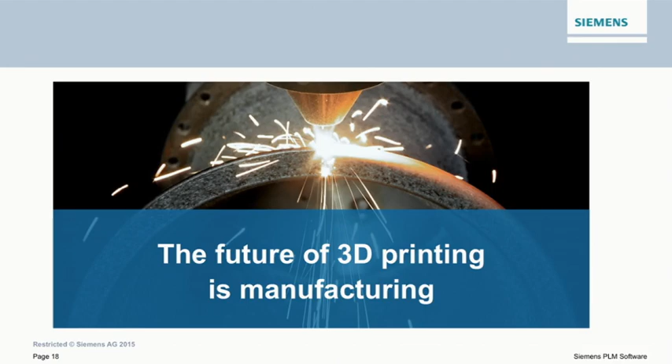So, in order to unleash these new capabilities, and in order for you to develop more innovative products faster, you have to really understand what is behind this. You have to liberate yourself from traditional process, from traditional thinking. You have to liberate your engineering creativity in order to really utilize this technology.

The potential of this technology is not so much limited today by the technology available today and what we have seen, what is coming tomorrow, but by our ability and your ability to utilize this technology.

Think in turning design for manufacturing, which is the traditional way of doing it, into manufacture what you design. Manufacture what you design. And that means think it, model it, and make it. So this is the slogan of this session: think it, model it, and make it.

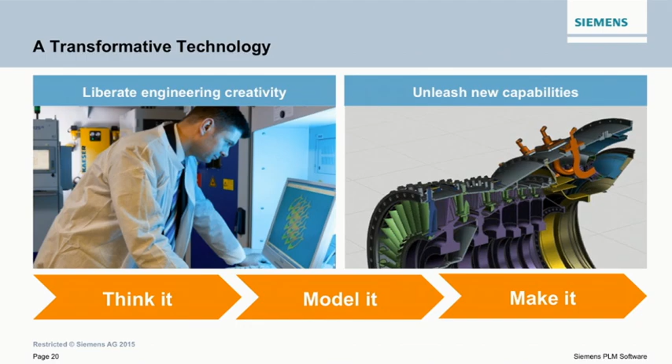And you will see a lot of examples why this technology is really a game changer. Listen, I have visited a lot of customers, a lot of companies involved in this, and I learn every day this technology is amazing and it can do amazing things.

You can actually design products which you couldn't make before. Totally new designs which can change the performance of your products dramatically. And that is a technology which helps you with this.

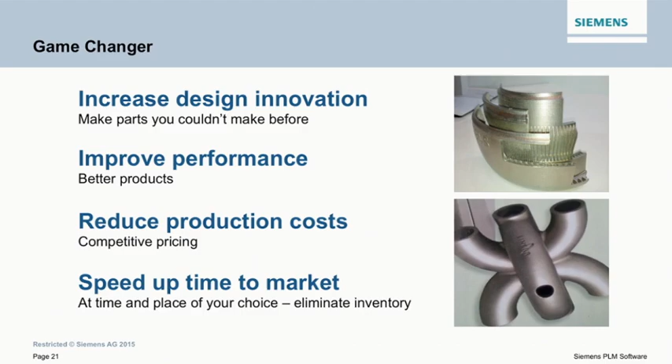It also reduces production costs in certain series. And at the end, and we'll see a few examples, it speeds up time to market. You can really do things faster, much faster than with traditional technologies.

You can eliminate your inventory, and you can produce wherever you want, at any space and time. If it's on the world or in space, they actually put a 3D printer on the space station already for spare parts, which is a funny thing.

So, anyway, this is a game-changing technology which allows you to do things which are completely different to what you have seen before. If you look at the market growth, this...

This market is growing like crazy, double-digit in the next years. And important to see here is also that there's a large service part to it. So if you're in the service business, that's your challenge.

That's your potential here. And the reason why it's a potential is because the companies cannot even apply this technology as fast as it's coming. And they're looking for service people who have the know-how and the skill sets to help them in the deployment of this technology.

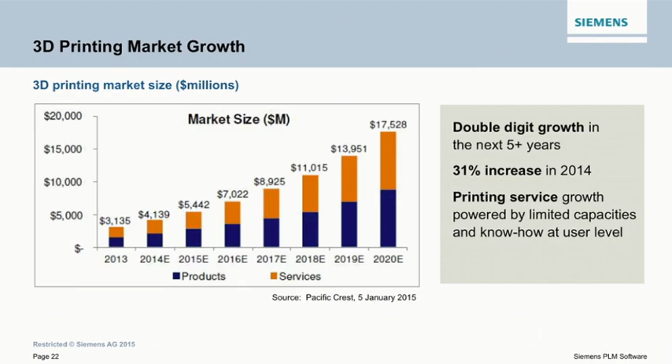If you look into the product itself, often people tell me, yeah, this is only in the consumer market, all this hobbyists and printing toys, that's a big market. No, it's not. The growth in this market is in industrial printing. That is where you are in, and that is where the growth is.

And obviously with it goes the material market. The material market will explode. It is the differentiator for you. You can make your materials in the future. There's enormous research going into this, and you can differentiate your product by making your own recipes in the materials.

This will be a change in how you think. You are an engineer who can define your own products with your own materials and define a differentiator for your products as you go. But the next slide is even more interesting.

Why do companies buy 3D printers? This is from Gartner, just recently in March this year.

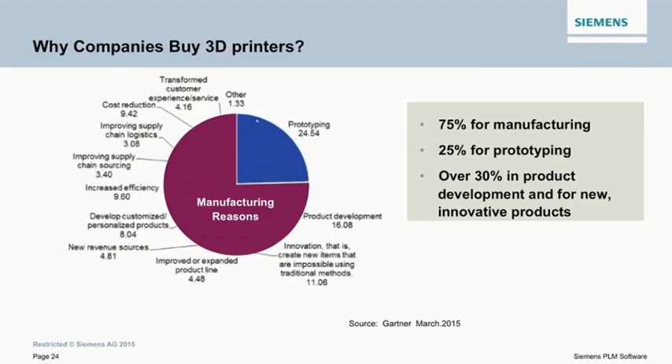You can see that nearly 75% of this feedback is due to manufacturing reasons. They buy these printers because they want to develop new products. They want to make innovative products. They want to improve their products.

The future of 3D printing is in manufacturing. It's nowhere else. It's not in prototyping - that's a technology we all understand. But the future is in manufacturing.

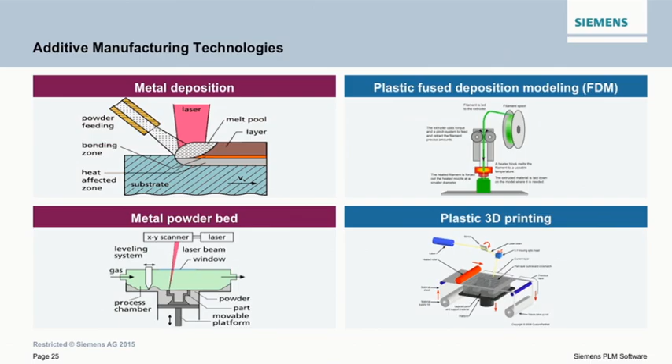All of you know by now there's a lot of technology out there, so I'm not going into a lot of details. There are obviously the two main areas, plastics and metals. In metals we have metal deposition technology versus powder bed technology. Same in plastic - you have the traditional FDM and the real 3D printing, which we saw a couple of examples of in the last weeks, which will really revolutionize the printing process. There's a lot of technology on top of this, and I'm not going into the details. I just want to make sure you understand the market is not one 3D printing - there's a number of technologies, and each has certain areas of strengths and weaknesses.

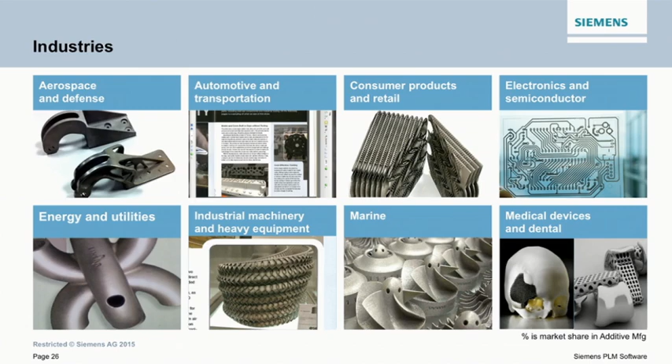The metal market is moving up strongly and taking over. In the industries, if you think this is not for your industry, you're dead wrong. There's an example of this technology in every industry. By the way, the revenue and the printing market per industry is pretty much even. It's not just complex parts, which maybe some people think - it applies to every industry we know. So there's no one industry singled out; you can apply this to every industry.

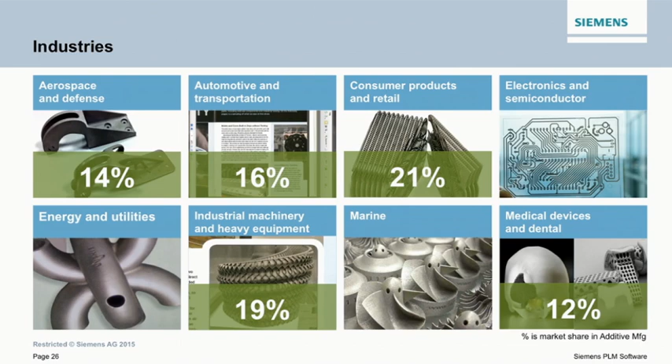A few nice examples - and there's so many I could show - just to give you an idea of where this technology is really applied very successfully, going into production, is the aerospace and defense industry. You see here the temperature sensor housing - that's the first FAA-approved 3D printed part which goes into a jet engine.

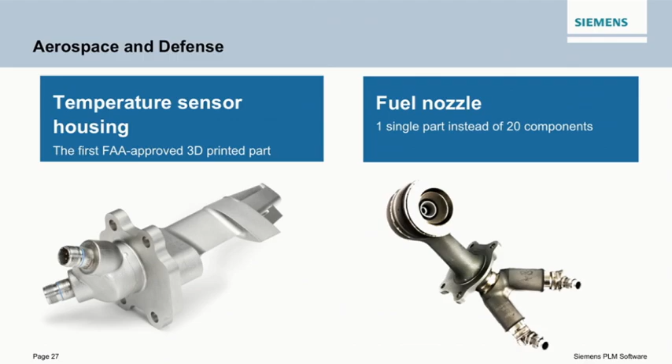And you also know the very famous GE fuel nozzle, a part going into production next year. They took a very complex part, made of 20 single parts, and put it into one printed part. That's an enormous thing, and the part actually has 5 times the strength of the old one - an enormous transition in what you can do with these technologies. By the way, Airbus just announced a couple of weeks ago that they have over 1,000 printed parts in their new A350 XWB.

That's enormous, and it's growing. Obviously there's a lot of plastic parts, but this technology is really taking its way in the aerospace industry. But not only aerospace - you saw that in the industry map - automotive is using it too. You might ask, why can I do that with such large series? No, they're taking functional parts, particularly for small first null series, and that's where the automotive industry is very interested to quickly produce these functional and prototype parts for a first series.

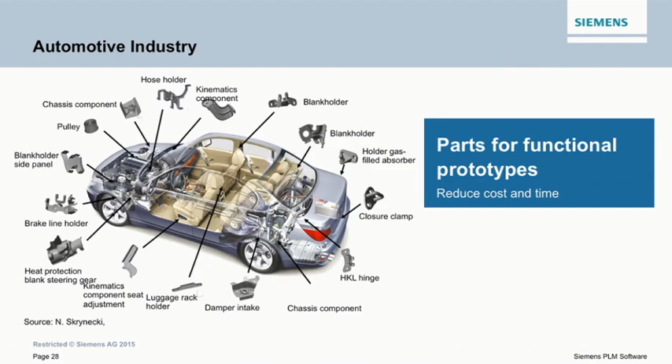Another very interesting area is mold and die - the mold area with equidistant cooling channels, a very difficult problem. 3D printing can help here, and also with complex parts. But there's also the possibility, which I saw last week, of plastic molding. For prototypes and small series up to 200 parts, you can use the printing process to print a complete mold, available in a day or two, versus making a whole mold, which is very expensive.

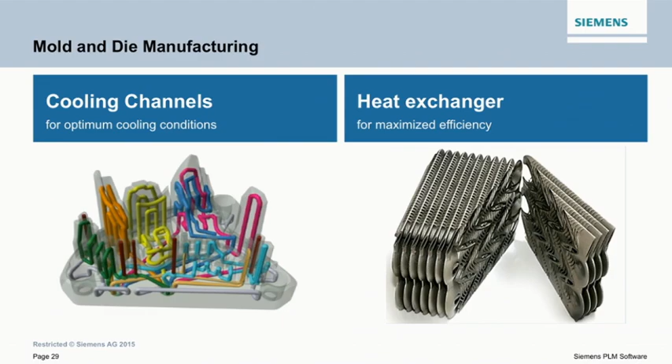Last but not least, the medical industry has really taken this on, across a large range of different parts - limbs, hips, and whatever you can imagine - and they personalize this. One very interesting example is a customized prosthetic, where the people who develop it can really change a life. This is a nice example of a young boy where two engineering students from a university in the Midwest developed and customized this prosthetic and gave the boy a new life. This is amazing, and it's an amazing story.

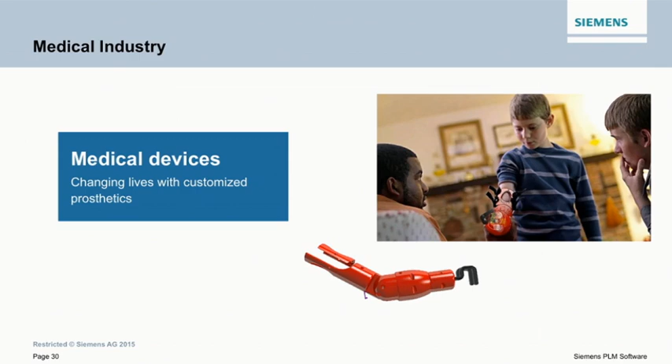Check it out on YouTube - it really touches you. So this technology helps everywhere.

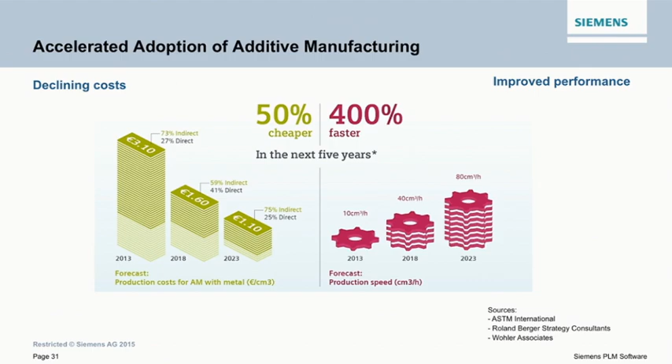But what accelerates adoption? You all say, wow, this is very expensive, and it is expensive, and it takes a long time to print. Exactly - those are the two factors the industry is working on. They're working on reducing cost, and these printers will definitely get cheaper - this is from the Wohlers Associates report. And the speed - the speed improvement is enormous, and I guarantee these numbers are probably too low compared to what's already being achieved. So these are the two main factors happening in this market.

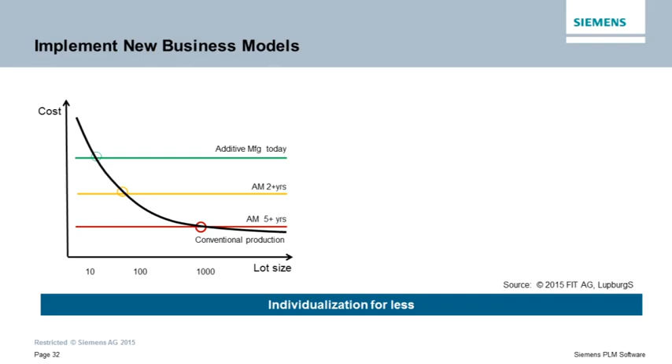If you look at the cost model in more detail, the implementation of casting is a big area for additive. Typically, the cost of a casting is very high if you only produce a small number of parts. The cost per part then declines if you have a large lot size. With additive, it's the opposite.

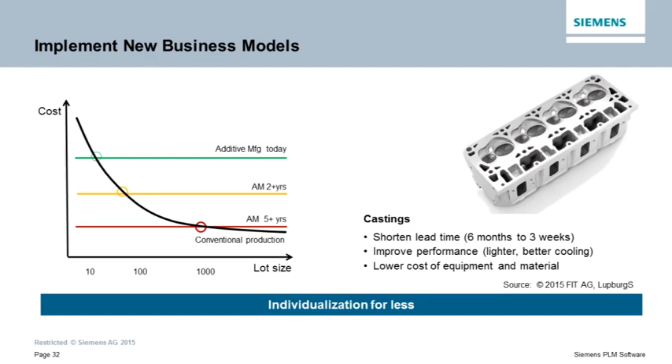It's always the same price, and today it's relatively high. So only racing car manufacturers, producing a whole cylinder block or engine block in very low lot sizes, find this works today. But in the next 2 to 5 years, the cost will go down.

This allows you to do even lot sizes up to 1,000 parts very cost effectively with additive. That means more individualization, smaller series for certain market segments, and new business models this technology enables.

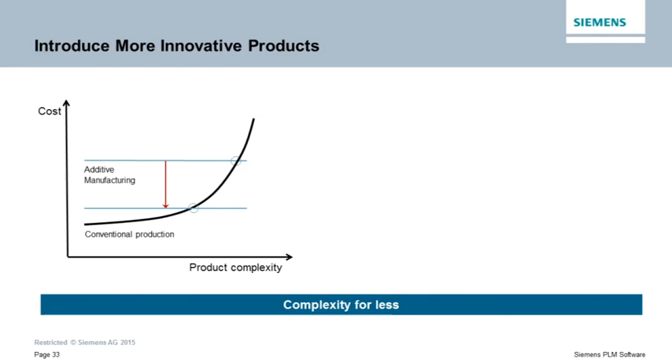On the other side, the cost for product complexity is the opposite. Traditionally, the cost of complexity goes up as the complexity gets higher. In additive, it really doesn't matter - it stays the same. So you can produce relatively complex parts.

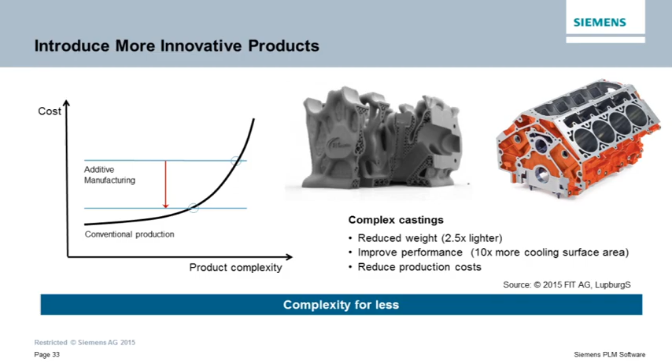Obviously, there's a break-even point today, and this break-even will also move down. It will give you the freedom to do more complex parts, more complex castings, which allows you to reduce weight. You can introduce lattice structures, enabling better performance and more cooling - giving you the capability to introduce more complexity for less money and create more innovative products.

So what's happening in the software industry? I always get asked, what's the trend, what's going on there?

Today, we have a lot of specialized software. We have hardware vendors with their own software, a few independent vendors very specialized in this segment, and the traditional PLM, CAD, CAM vendors try to support it with maybe an STL output - a very dumb format. There's a little bit of open source, but they're not really involved. What I think is going to happen in the future is the following.

We're going to see, on the low-end side, a very automated process. STL will be removed by new standards that companies and consortiums are working on - there's AMF, Additive Manufacturing File, and 3MF. This will drive a very automated market.

The other movement is really the integration and the demand of moving that technology into the PLM process, and that's something I want to talk about. This is more important because as an engineer you need this technology during your design phase, your engineering phase, while you analyze your products and while you manufacture them. You have to understand that technology, and that is why this market will grow.

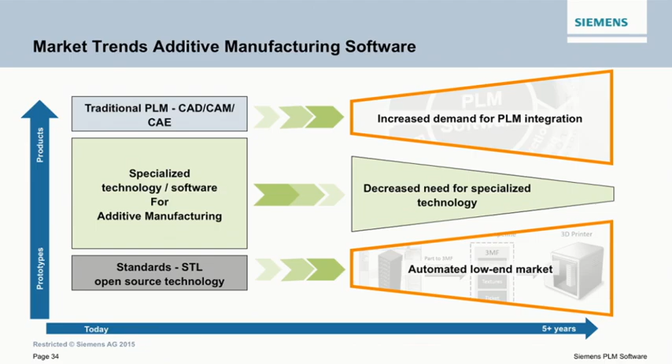While the specialized software is probably decreasing over time, the hardware vendors will work together with the traditional PLM vendors to drive this technology. So there's a huge movement over the next 2 to 3, 5 years happening in this technology.

So what are we doing at Siemens? What is our agenda? We've actually been looking into this very intensively for the last 1.5 years. We started, as everyone typically does, in the manufacturing area, and we'll talk about that at the end. But we're also looking very intensively at the impact for design. There are a lot of things we're currently involved with, developing prototypes, and you'll see this technology increasingly becoming part of our traditional design system.

So some things like design rules and conditions for additive are a very new field - we have a number of research projects on this topic. Design of lightweight structures, as you could see here, is a major advantage of additive, and it's also something we work on.

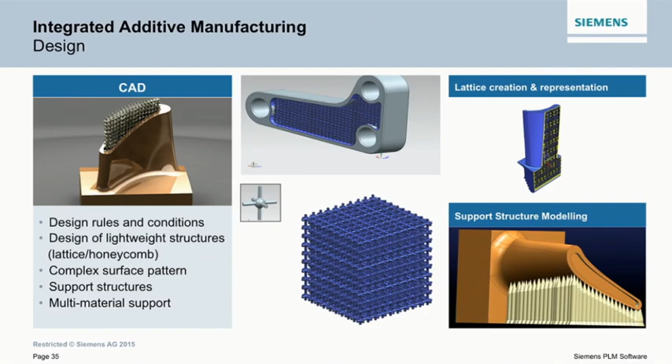Complex surface patterns, or the support structure idea, are very important for how you position and build your part. And there's a whole thing going on in materials. Multi-materials, the way you can build parts out of two materials or graded materials, is an enormous technology which has to be captured from the design phase onwards.

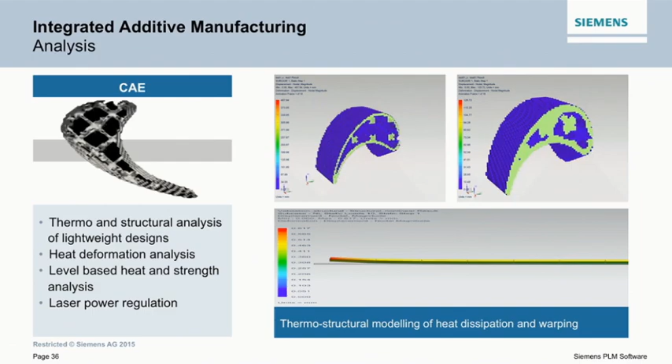The same thing applies in CAE. The engineering part is the most important part. Today, everything is taken over the wall to the manufacturing side in a very dumb format. You need engineering tools to understand structural analysis, heat transfer, deformation, level-based analysis, and you have to regulate your path and your power based on what you want to do and based on your part. So topology optimization, all these things have to be integrated, and there's a feedback loop to the design and to the optimization.

Last but not least, in CAM, we're looking not only into one technology, we look over the entire spectrum, and we're working with a lot of these vendors to understand what that means from a manufacturing point of view, how do we implement that, and how do we integrate this technology more into the entire product life cycle.

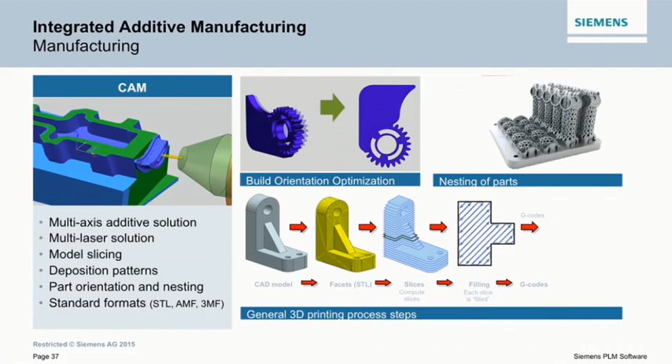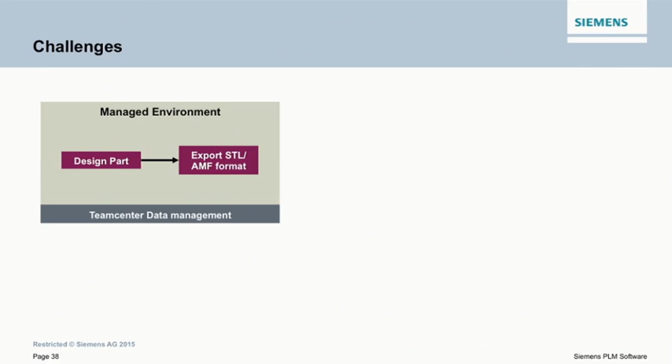So the challenge today is really moving this technology. What we have today is really an uncontrolled environment. You have your design part, you export an STL, and that is where your managed environment normally ends up. That's a typical problem in prototyping - you export something out of the managed environment and prototype around it. But this is not what a production environment can do. In production, you cannot stay in an unmanaged environment with different types of technology to get to your printed part.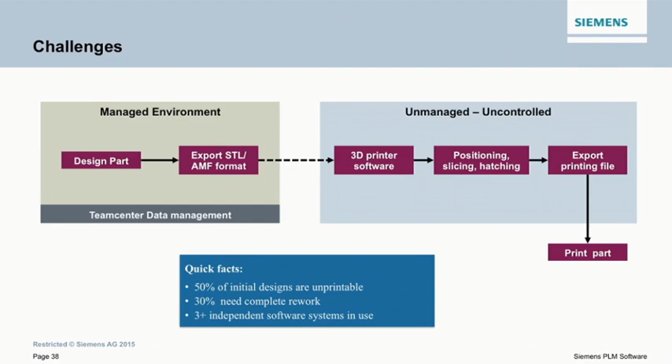There's a little statistic I read a couple of weeks ago that says 50% of initial designs are unprintable, because they're just pushed over the wall. A lot of them need complete rework. They typically use 2 to 3 different software technologies to position the part, nest the part, slice it, and so on and so forth.

This is not our vision. Our vision at Siemens is to really have a fully managed PLM environment in NX and Teamcenter, which allows us to design a part, bring it into analysis and optimization, define the laser path and the build position, and generate the file which actually goes to the printer and prints the part.

This allows us to really implement a feedback loop. This feedback loop gives the engineers real feedback and analysis that the part they're creating is really working and does what it's supposed to do. And obviously, we manage this in our data management, in our Teamcenter.

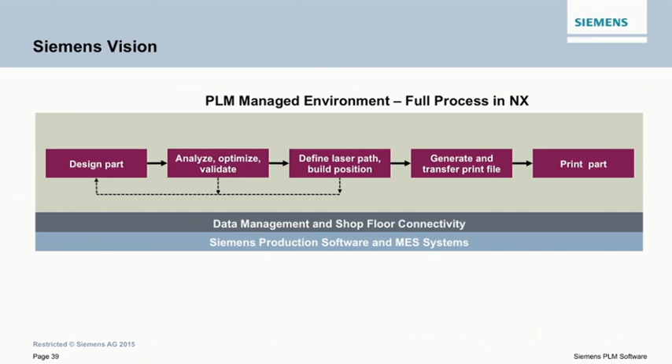We can take this down to the shop floor. We can treat the printer as a typical manufacturing environment, equipment parallel to your traditional machine tools, and we can manage this as an end-to-end process. With the Siemens environment, we can link this into our MES structure, building an entire end-to-end process managed from a production environment. This is our vision. This is where we're going.

So at this stage, we're changing a little bit and talking about hybrid manufacturing. I'm really, really excited about that technology, and it's something which I believe is really changing the way products are made.

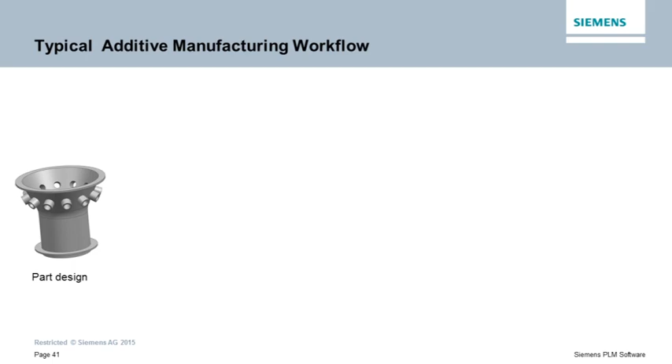I thought I'd explain a little bit how the normal printing process works. Here's a part which you can see is quite complex. It's supposed to be a jet engine housing type of thing.

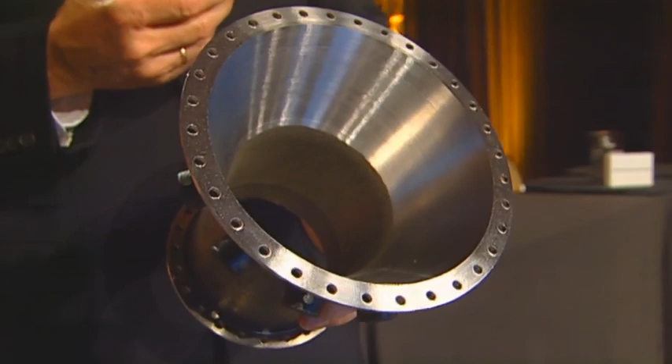And this part, if you do it with a traditional manufacturing process, you basically have to take an STL file, as I just explained, put it into a 3D printing software, and print the part. But the printed part is not ready - it's by far not ready to be used.

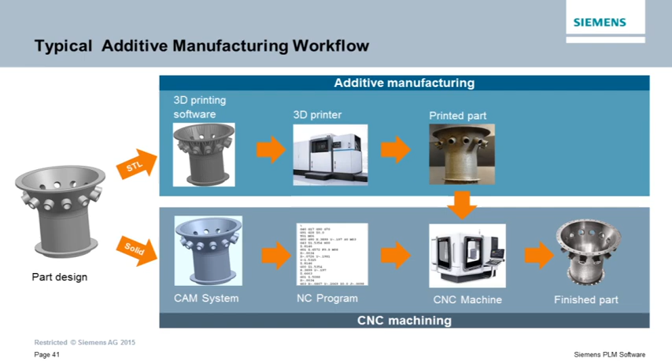So what you have to do is start a second process. You take the solid model into your CAM system, generate an NC program, generate another setup, and put it on a CNC machine with the printed part, until you have your finished part. So what does that mean? This is one design part, two export formats, and you have two systems you work with to program.

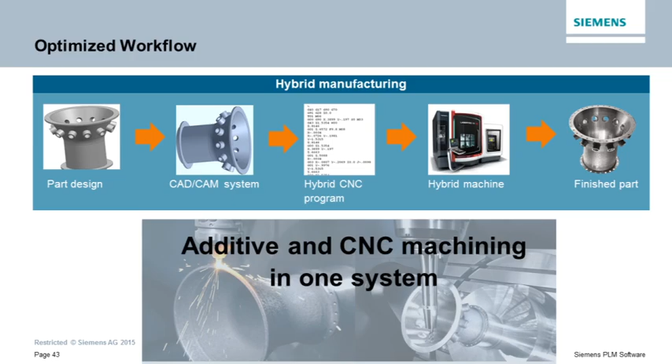You have two machines, two equipment, two processes, and two setups, and you have to align all of this. So it's complicated. But it's not complicated if you use hybrid manufacturing. With hybrid manufacturing, you have one part, one system to program, one hybrid CNC program, one machine, and you get your finished part. That's the revolution. Additive and CNC in one system. Ladies and gentlemen, this is what it is.

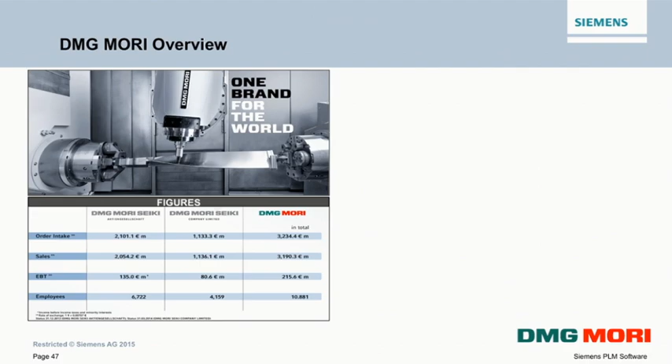I want to talk a little bit about the technology and the way we came into this. First, an overview - I'm from the DMG Mori company. It's a corporation of the two biggest machine tool manufacturers worldwide, DMG from Germany and Mori Seiki from Japan. Since 2 years, we have a common branding and we market the machines together worldwide. In total, we have a revenue of around 3.2 billion euro with 11,000 employees worldwide. We are running 21 manufacturing places, mainly in Europe and Japan, but also since 2012 we have a pretty nice manufacturing factory in Davis, California, where we produce mainly for the American market. As a global company, we need local presence, so we have 145 local subsidiaries which are in charge of sales, service, and training for their markets.

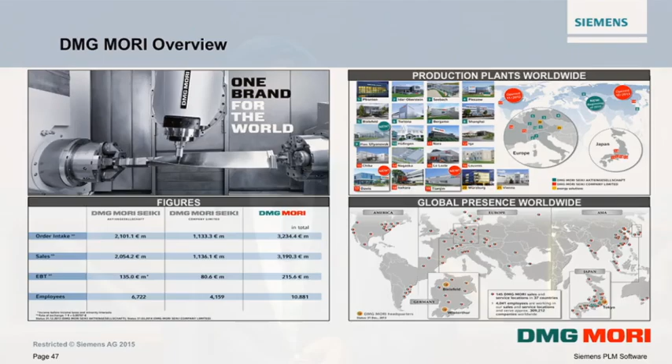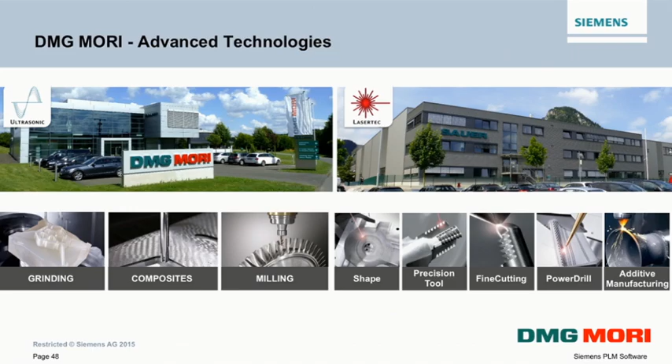I myself am coming from the Sauer company, which is part of the group and in charge of advanced technologies. We have on one side the ultrasonic technology, which does ultrasonic grinding of very hard and brittle material, but this technology is also good for composite machining and for milling of super alloys like Inconel or titanium. On the other side, we have the Lasertec, with different laser technologies that all have in common that it's high-end applications which need 5-axis, very accurate 5-axis machine tools, needing a lot of software, laser technology, and process know-how. And the latest of it is additive manufacturing - that's what we talk about a little more today.

So let's look at the laser itself. The laser is a pretty new tool. It was invented in 1960, and it took a pretty long time until it went from the scientists into the industry, and they found a use for it. In the 80s, it was introduced into manufacturing for sheet metal cutting - the laser - so not too long ago.

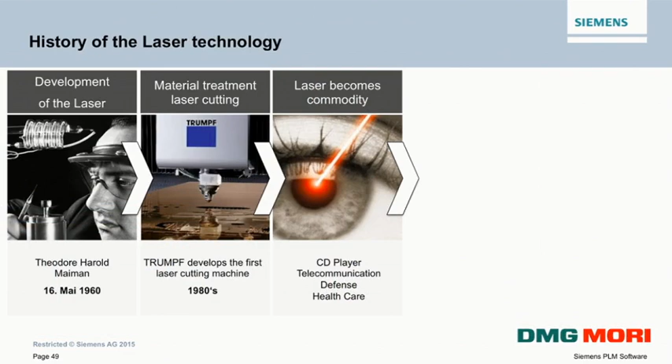In the meantime, the laser has become a commodity, as you all know. It's used in every CD player. You find a laser in telecommunication, in defense, healthcare - it's in our daily life. And if you look at manufacturing, the laser has been a substitute for a lot of conventional processes like welding, 3D cutting, hardening, laser engraving, and even drilling. The laser often shows to be more efficient and gives a better quality at the end.

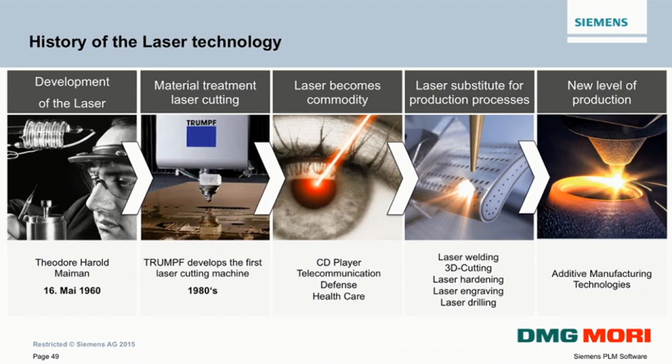Now, with additive manufacturing, the laser comes to a new level because it's not a substitute, it's a complete new process of producing parts. So it's a new level and it brings us new opportunities also, like you've heard today already.

So we thought with additive manufacturing, what we're going to do—because all the additive manufacturing methods that we evaluated in the metal field, since we are a metal machining company, all these technologies did not bring the quality and accuracy that our customers are used to from our CNC milling and turning machines.

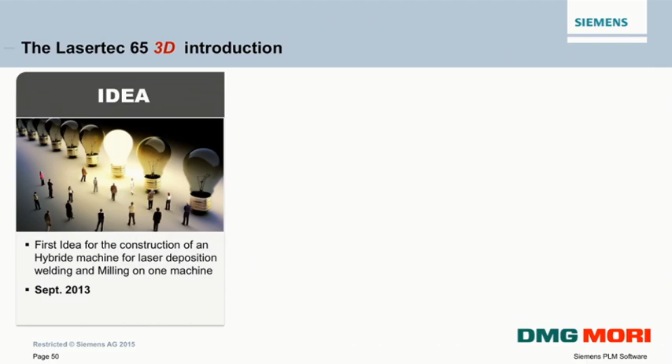So it was the idea that we put additive manufacturing, like a laser deposition welding process, directly into a machine tool, so that we can combine the quality of milling with the flexibility of additive manufacturing. We presented this idea to our board in September 2013, just over 1.5 years ago.

We got the approval, yes, we can develop it, but we had to have a prototype at the next exhibition, which was only 2 months later at Euromold in Frankfurt. So within 2 months we built a prototype, or I would call it a functional study, but it was a machine able to build the part you've seen already today, and we had a tremendous result.

We had a crowd of people around the machine the whole 5 days of the exhibition, and we were lucky we put a huge screen next to the machine so that people who couldn't look into the machine could at least see the principle of our technology on the screen.

Actually, someone made a copy of the video with a phone, and the next morning you could already watch it on YouTube. It has become one of the most watched technical videos on YouTube.

So it was an easy decision to continue and develop a series machine, which was introduced in the United States for the first time last year in September at the IMTS exhibition, a week later in Stuttgart, Germany, and in November in Tokyo.

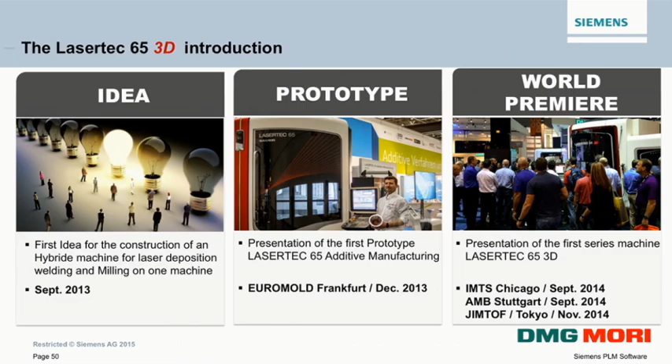So what is it? What we do is use a 5-axis universal milling machine with a trunnion table, and we integrate the laser head with an automatic exchange possibility.

So we have a shuttle that moves the laser head in and out, so we can change automatically from build-up to milling, and build and mill. So even areas that cannot be reached on the finished part, we can mill in between. And when the machine is milling, the laser is completely outside the working area.

We can use high pressure coolant, the tool changer, and everything we need to get a good result from the milling side.

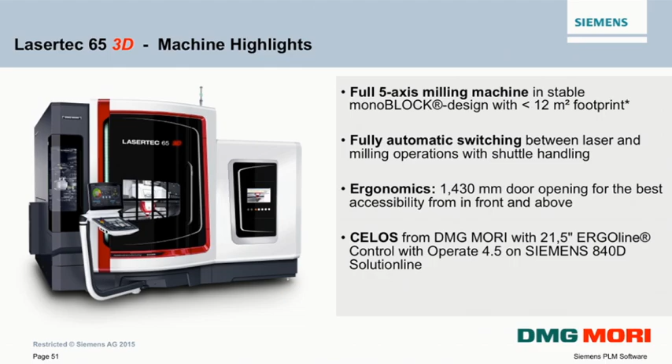So with this machine, we already have different variations in the meantime. We offer the machine also with an FD option, meaning a turning table included, so we can turn and mill parts if we have rotary symmetrical parts.

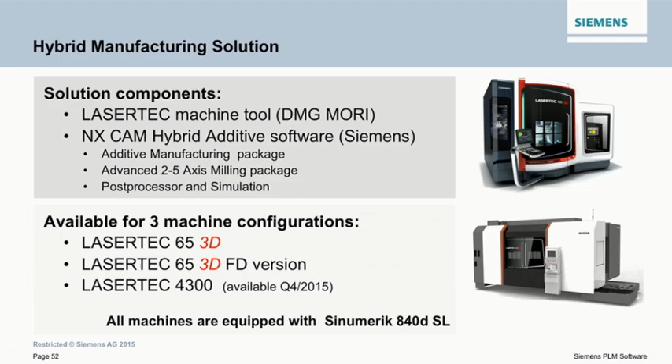And by the end of this year, our Japanese partners will launch the technology based on a turning center with a milling head included, for long parts. So it becomes a whole family, and of course all these machines run on the Siemens Sinumerik 840D controls.

Another surprise—not only the number of people and companies interested in our technology, but also a big variety of applications.

We mainly thought about building parts, of course, not only prototyping but also production, small series, mid-series, and we certainly had inquiries for these applications. But we also had a big number of inquiries for repair in the mold and die industry, in the aerospace industry, turbines, gas turbines, and many other applications.

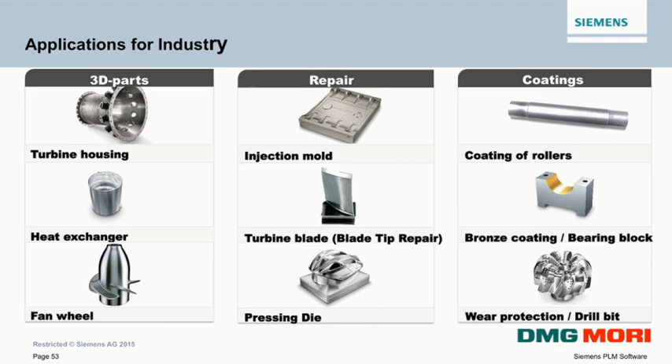And even for coating applications, we have big interest in doing coating and then partially finishing the whole part afterwards with our chip-making technology—mold and die, bearings, rollers, and also a lot in the oil and gas industry.

Here is some example. We recently did a small turbine blade about 3 inches high, built from Inconel 625. You see it here, milled down halfway.

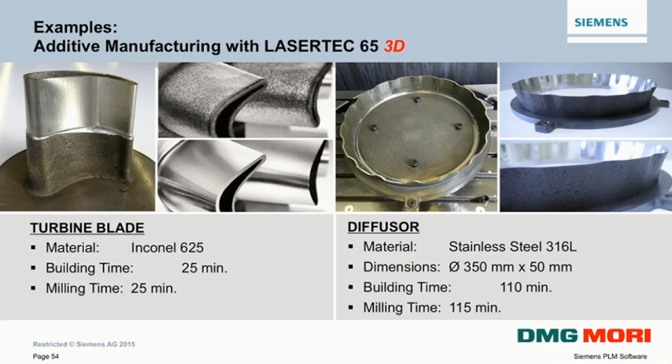If we build it up and mill it down the full way, it takes about 50 minutes for one part. On the other side is a diffuser made from stainless steel, about 14 inches in diameter and 2 inches high, and it takes about 110 minutes for building and about the same time for finishing with the milling.

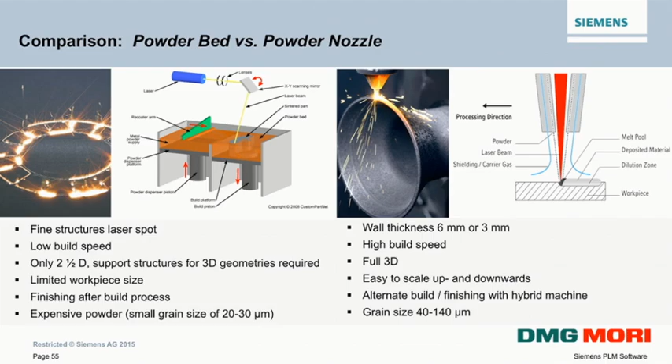So some different applications, and you see the flexibility. If we compare our technology with the traditional, more established powder bed technology, the typical 3D printer, we see that the 3D printer, because it's only building in one direction, is a 2.5D technology, capable of doing very fine and intricate parts but with a very slow build rate. Our technology has a much higher build rate, about 10 times faster, but therefore is more for larger parts and not the very fine detail.

And we can directly finish. So if we look at the whole process, it's much more than a machine. The first question for us was, how do we get from the CAD model to the finished part? There was a very quick way to Siemens to start the cooperation, to get a good software where we have the additive and the subtractive process in one programming system. We don't want our customers to need different software solutions for the different processes. It will never be successful.

Besides that, there's a lot of development from the materials. Every material needs laser parameters, needs process parameters. The process itself needs a closed loop control, needs measuring technology, needs simulation, and also here Siemens can be very helpful. So if you look at the whole picture, you see the whole process is much more than the machine, and it's a very challenging and interesting project, and we are happy.

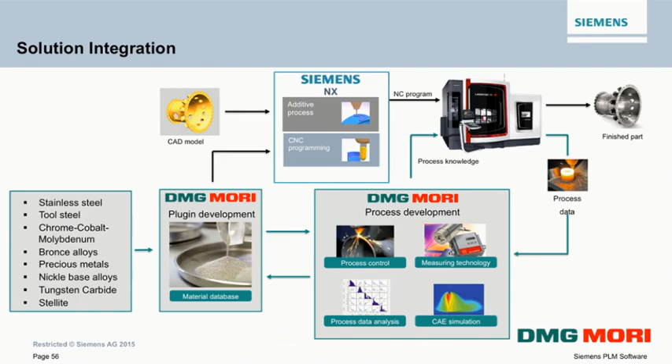We have now about the first 10 machines we have sold. The first 5 are installed, and of course our targets for the future are much higher. Good, thank you very much.

Okay, I'd like to wrap it up. I think you have earned the evening event. As you saw, this is a total solution. It is not just a machine, it's not just software, it is an integrated part of what we're delivering to our customers to make this technology happen. It is an integrated system.

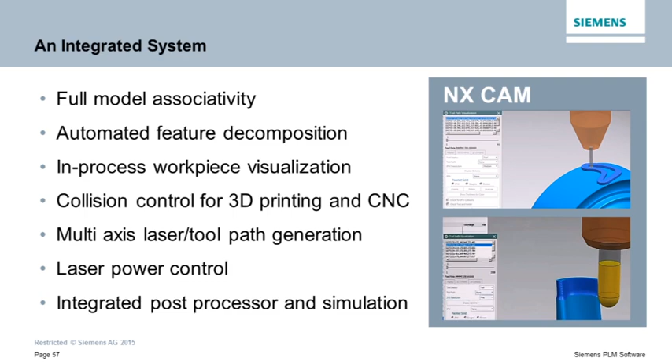We made a clear decision from Siemens' side that this is something we want to really, really tightly integrate in our standard software and allow a fully associative model with visualization of both processes in one system. And it is a 5-axis system, that's why it's more complicated than a standard 2-axis thing, and there's a lot of things you have to consider in this type of process.

We have worked hard together, and that's why we're happy to be able to launch this today and make it available to the market. I'm pretty sure you will be excited to see this too, and there's many more exhibitions where this will be available. There's one session on Thursday, after lunch, in Austin 3, Complex Machining, where we'll show you much more detail on the software solution and you can ask questions about the details.

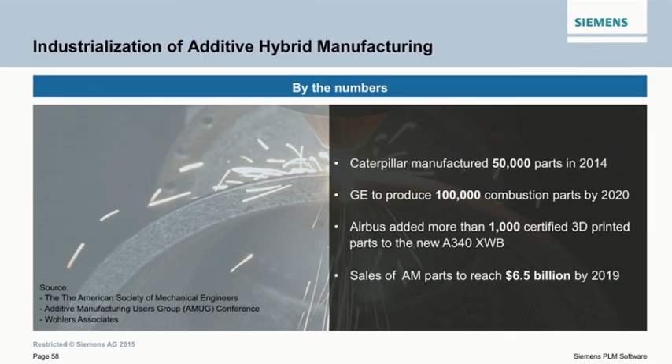To wrap it up, the industrialization of additive manufacturing is happening. It's in the process. Manufacturing is the future of it, and there's a lot of people who have started to look into this technology and successfully applied it. I think this is going on. Nobody can stop that anymore, and you all should get involved and get excited and start back, thinking about this from the design, the initiation, the idea of it in a product down to the manufacturing process.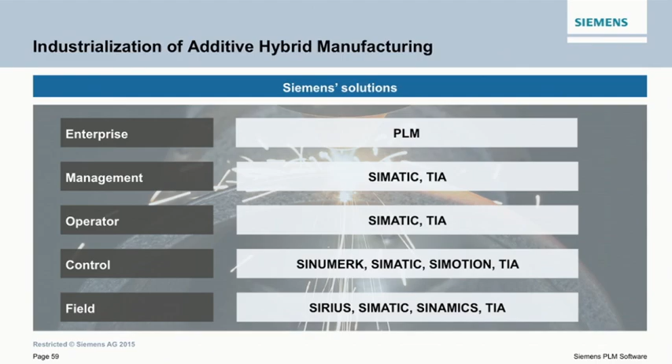We as Siemens will support you. We have a whole stack of technologies from the enterprise, what we have seen today, down to the shop floor. We saw we're using our control systems in that technology, and we're supporting you in deploying this process. Because at the end, you have to have an automated process where parts and material can be automated and flow into the production site. So if you have any questions and are interested in deploying this technology, we are your partner. We're working with you and supporting you in the deployment of this technology.